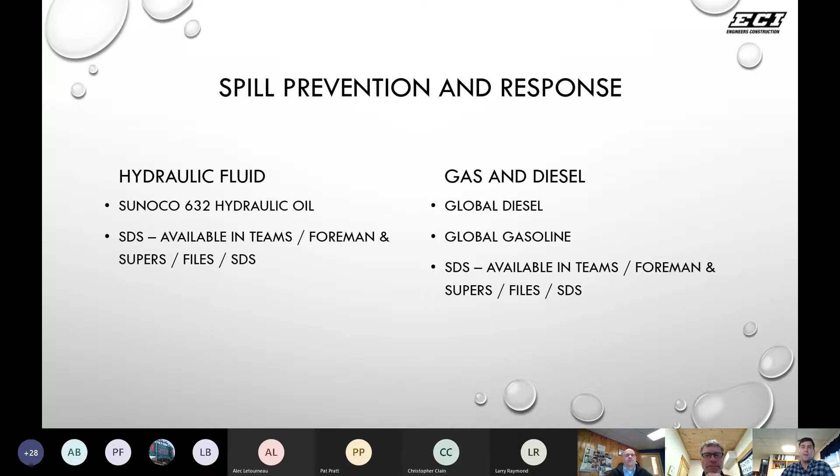So again, the SDSs are available for both. If on your team foreman and supervisor's team channel, if you go under files, SDS, you'll have access to these SDS to read more on the spill prevention and response. For the most part, it is kind of common sense, but it is located there.

So our best practices, again, follow that code item: work in an environmentally conscientious manner, but also be prepared, have spill kits readily available. All kits are available in the tool crib, so get with Elliot and he can make sure that you're well stocked.

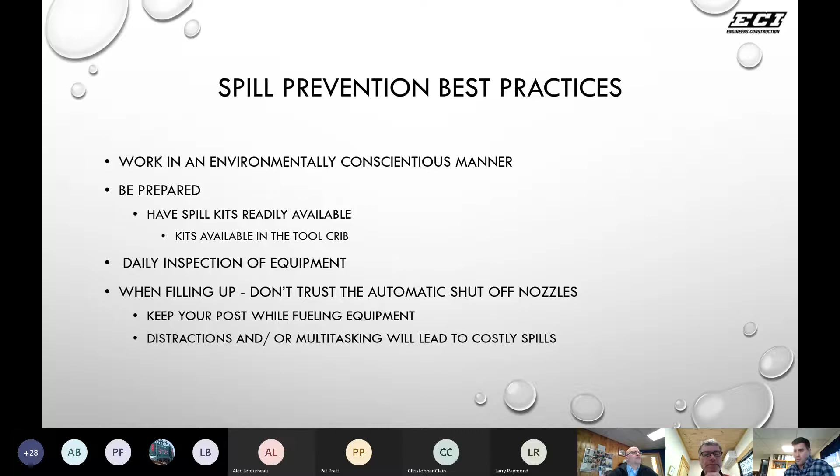Daily inspection of equipment is vital with best practices for spill prevention. A lot of our diesel and gas spills happen when we're filling up. We seem to like to trust the automatic shutoff nozzles, and those are known to fail. So let's always keep our post when filling up, pay attention, focus on the task at hand. Distractions or multitasking will lead to costly spills. Let's really focus in on that moving forward and follow those best practices for prevention.

So when we do have a spill, we need to make sure we de-energize the system and stop the spill immediately. Never search for leaks with your hands if it's under pressure. Use cardboard or any other type of plastic, but again, just don't use your hands to ever try to find a spill, especially if it's under pressure.

Round up the spill kits, try to control it. With a very large spill, use our spoils or any other earth material to dam up and isolate. Try to keep it from any catch basins or rivers. Notify the project manager immediately, and then notify the mechanics, Pat Wells, for maintenance to get us the right pieces that you need to make the repair.

And along with that, call myself, Health and Safety, for assistance with waste management and reporting for the actual spill. We would like to keep all spills over 2 gallons on site. So please, when you call maintenance, have them bring a 55-gallon drum with you and try to keep all waste on site. We'll create a generator ID, site ID on that project location, and we'll schedule pickup with our vendor to try to keep that waste from coming to the shops.

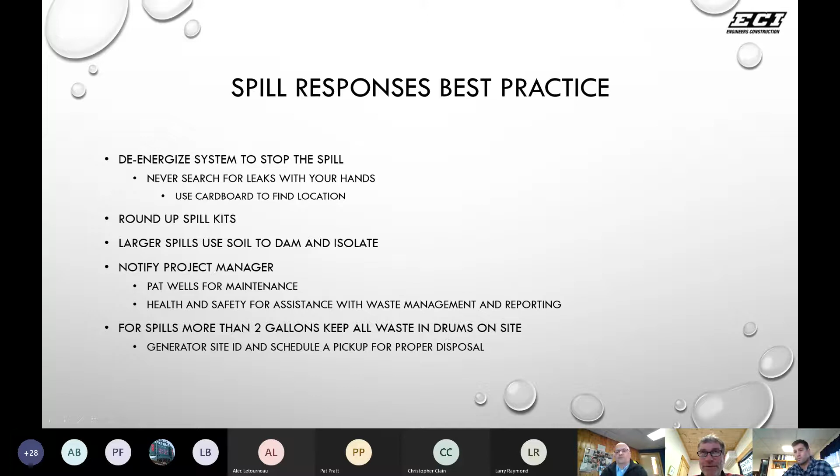With that said, Ken, take it away. Okay, I think the first thing to do this morning is to say let's locate our spill kits on every job so we know where they are, and that they're accessible and complete. Yep.

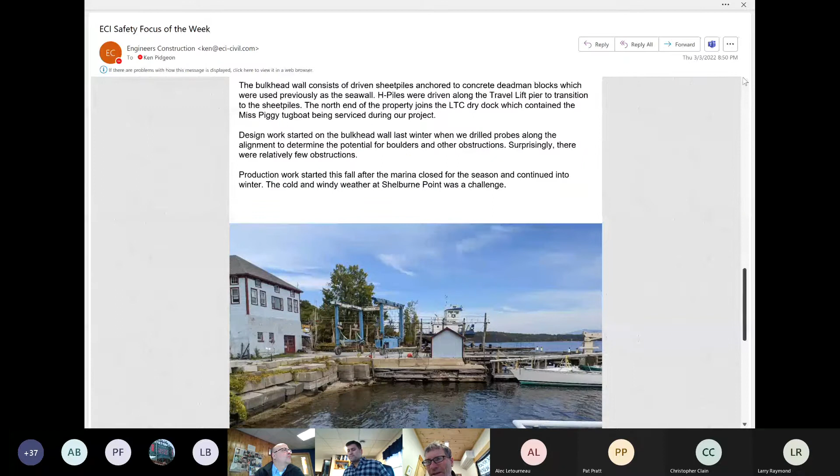And the weather outlook: gradual warming, but first we had last night's cold weather and this morning. It's still going to hang a little cool at nights, and then it looks like it's going to warm up above freezing quite a bit next week.

COVID policies are certainly getting relaxed recently, which is great news, and the caseload has gone way down. Very positive things.

So this week we're going to talk about the Shelburne Shipyard anchor bulkhead wall that we built in Shelburne. These last two weeks we did the Burlington Vermont Railway Amtrak work, and we have one more segment of that. We're waiting for some materials to come in to finalize that last segment, but for this week we're switching to the Shelburne Shipyard.

ECI is contracted, or was contracted, and still is actually, with Safe Harbor Marinas of Dallas, Texas, to design and build the new bulkhead wall along the waterfront of their facility. Safe Harbor purchased the Shelburne Shipyard in 2019 and is in the process of renovating and modernizing the marina. The bulkhead wall consists of driven sheet piles anchored to concrete deadman blocks, which were previously used as a seawall.

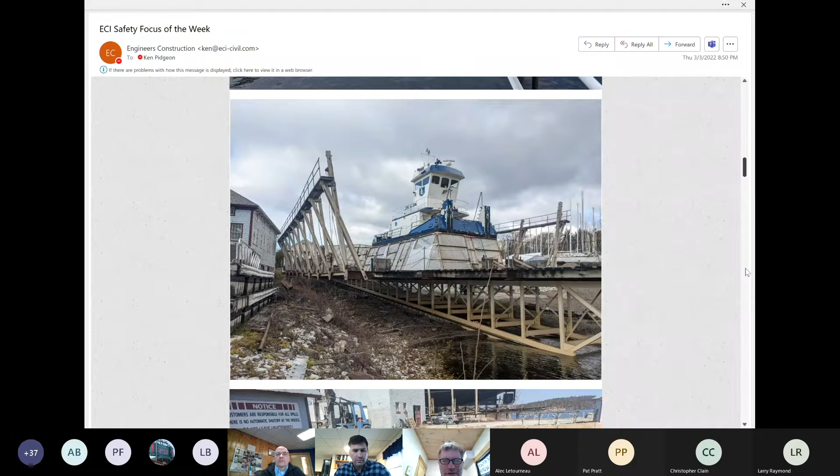I need to go slowly progressing down the screen, otherwise it jumps. There we go, there's the Miss Piggy. That's on the north boundary of the property line, right on the property line, just beyond. And this whole structure that it's sitting on is on rails, and that slowly gets pushed back into the water and dragged up into dry dock. So we had to be conscious of the clearances needed for this new wall.

There's another picture you can see. It kind of looked pretty crappy with a lot of broken up concrete and sagging timber cribbing, and the concrete blocks didn't look very pretty and appealing.

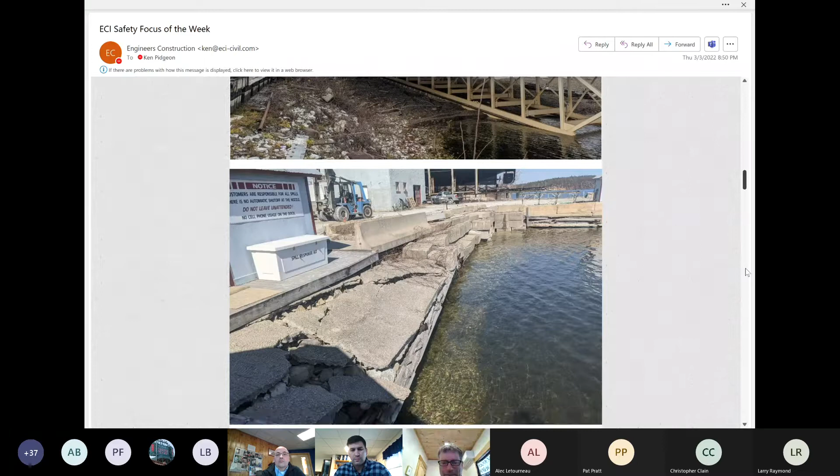So we went to town and we drove - here's on these finger piers for the travel lift. See, the travel lift goes out, and it's really just a couple of wide flange sections laid horizontally so that the flanges kind of guide and keep the travel lift on track there. And we drove the H piles on either side to start the process of driving sheet piles between them.

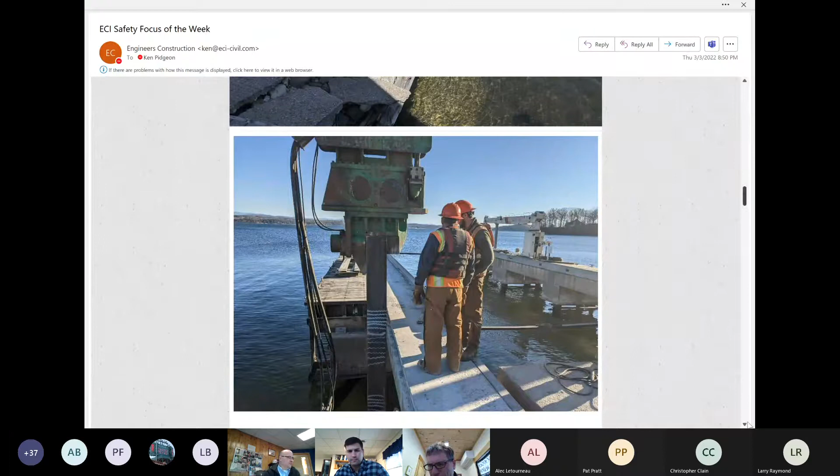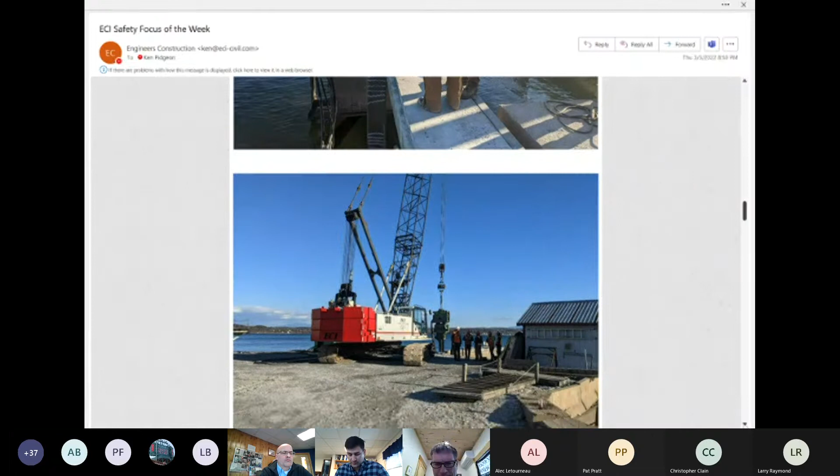And we were using the vibratory hammer here, driving the H pile again early on in the late fall. And then it got colder.

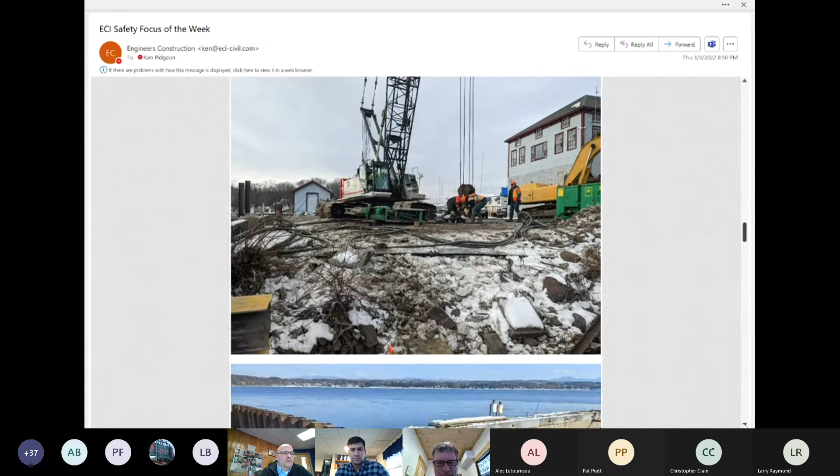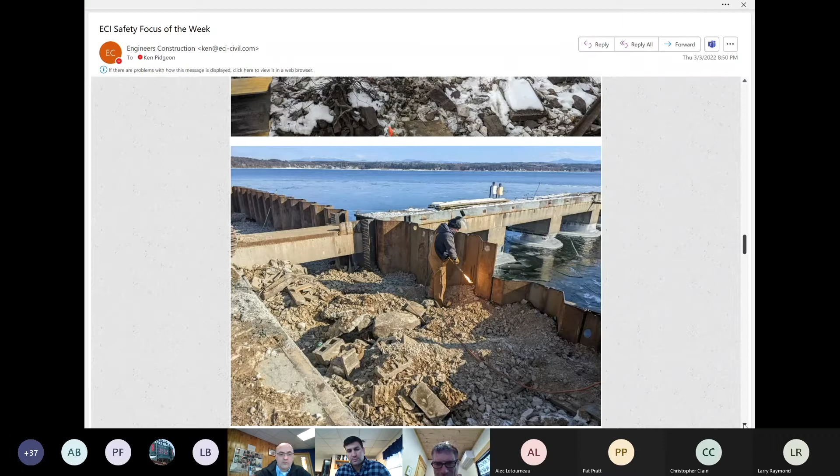Got all the sheet piles driven, and then we cut off the tops and made holes for the anchors. You can see the debris field of material that was in there, of course the concrete. There's obviously cinder blocks, wood, steel, and all kinds of stuff laying around, but generally a coarse free draining material.

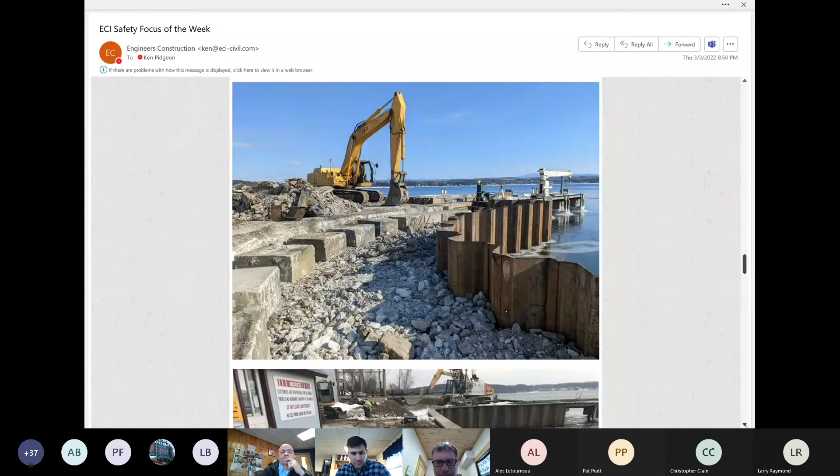And then you see how we recovered some of the waste blocks and set them up to be dead man anchors, and the anchors aren't shown there, but you see the holes in the sheets. In this one area in front of one of these buildings, we didn't have the room for the waste blocks, so we poured in a cast in place dead man anchor wall. And then you can see the top cap beam is installed here at this point as well.

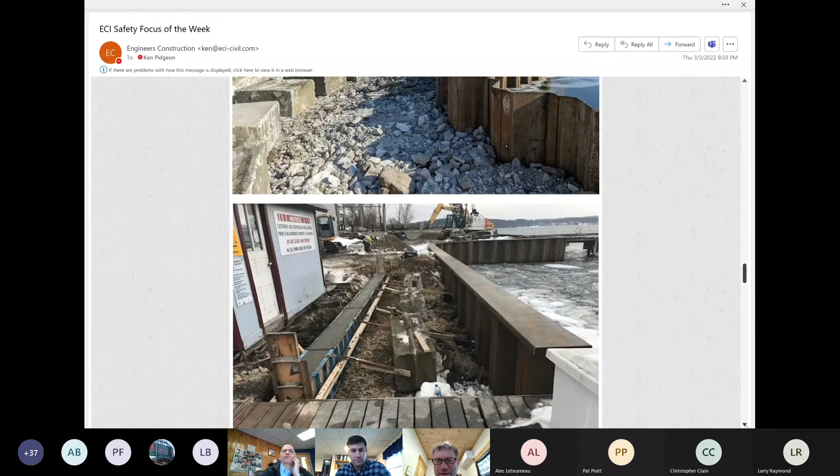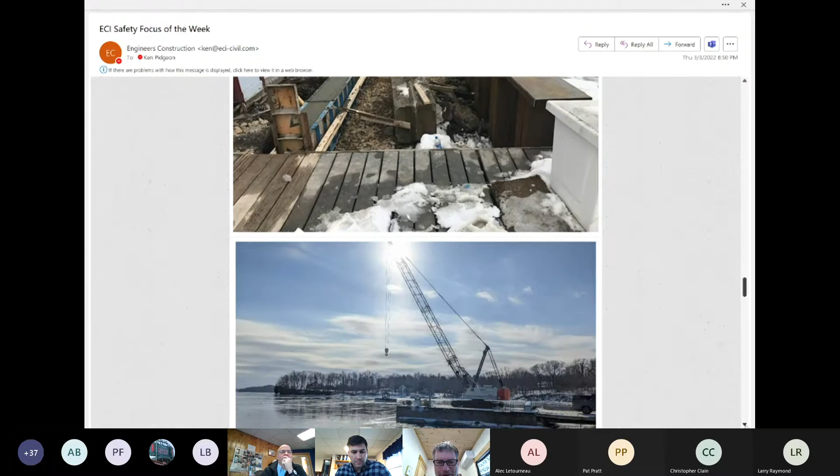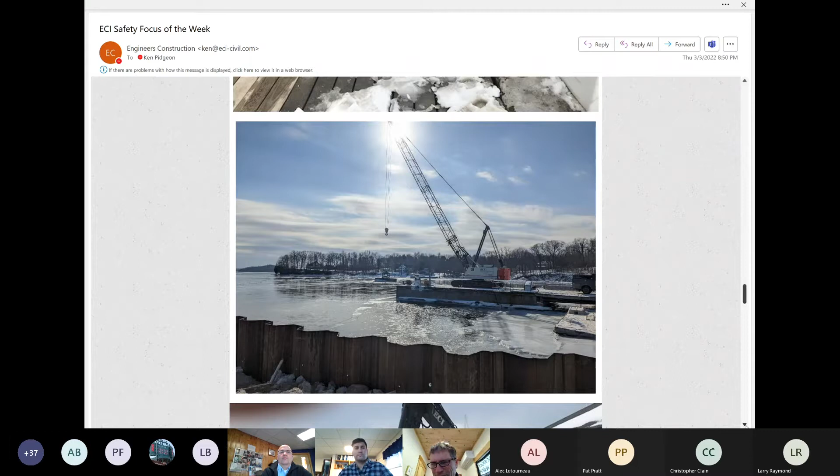This next picture shows what it was kind of like on those cold days out on Shelburne Point, exposed to a lot of wind coming from the northeast and coming over the top from the west. It's a pretty brutal area when the wind's blowing hard.

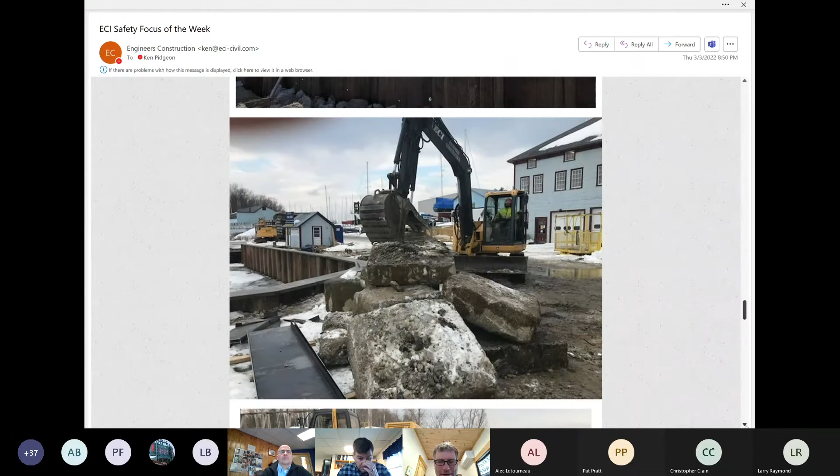There's an example of some of the materials that we removed and got rid of from this operation. We backfilled with a dense graded type product on the top.

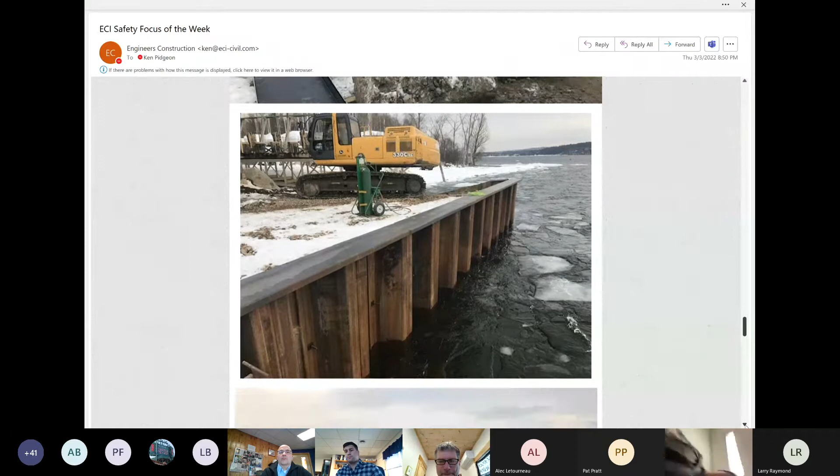And there's more photos of some of the completed wall with the cap beam in the travel lift area out there.

And looking back towards, they have a concrete dock. We ended at the concrete dock. The original plan was to wrap around it, but that didn't turn out to be very feasible or necessary. I don't know where they got the idea, but that was changed after it was realized that driving the sheets out there was going to be too much of a challenge.

And just a few historical notes here. The boat making at the property dates way back to 1797, and the shipyard was founded in 1820, so it's over 200 years old for the shipyard. It was founded by the Champlain Steamboat Company, and the Griswold family owned it just prior to the purchase by Safe Harbor.

So obviously a lot of those concrete waste blocks were there because the Griswold family owned the property and had easy and inexpensive access to waste blocks. Jack Kirk probably had something to do with some of those waste blocks. Yeah, probably right, yep.